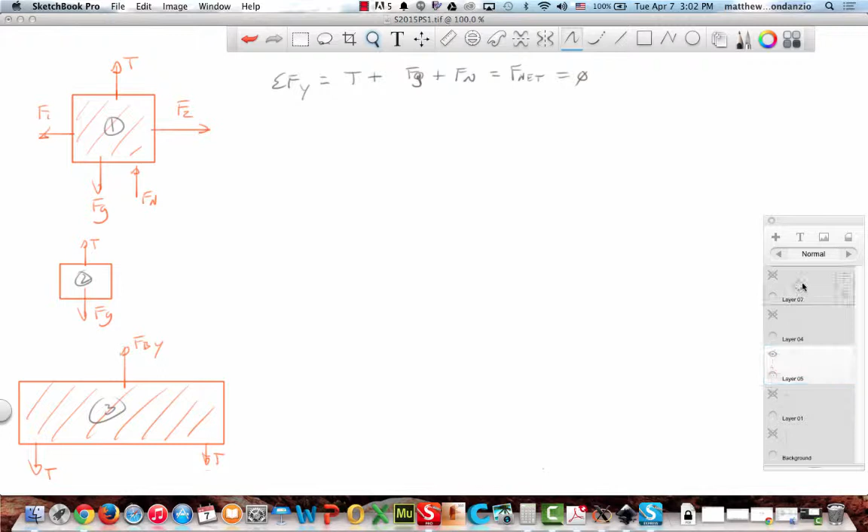Okay, quiet, quiet. Shh. Okay.

Okay, so this is the problem from last week, okay? We're going to hopefully get through all of it today. I might not get through all of it. We're going to finish up tomorrow. We're going to continue on with friction and torque. We're going to do one more quick problem with friction. Actually, we're going to do one more, not quick problem, but an angled block problem so we can deal with an inclined plane. And then we're going to move on to torque, okay?

Yes. All right. We're going to have a laser cutting project for everybody in torque. We're going to make a mobile of some sort so you can actually physically make something, okay, to do balance and center of gravity. Huh?

A what? No. This should be a lot quicker. Yes, sir. No. You guys, where's yours? You were saying no. You can watch it. I want you to watch this. Okay. Turn it in. Okay. I really don't care. Right. My issue is I want you to understand the problem. Okay. So work it with me. And if you get questions, you talk to me. Joe, what's up?

I'm still working on the requirements, but I'm determining, do you guys want to make your own mobiles or a large class mobile? Okay. We're going to do a large class one then. So you have your own individual pieces that you'll do. All right.

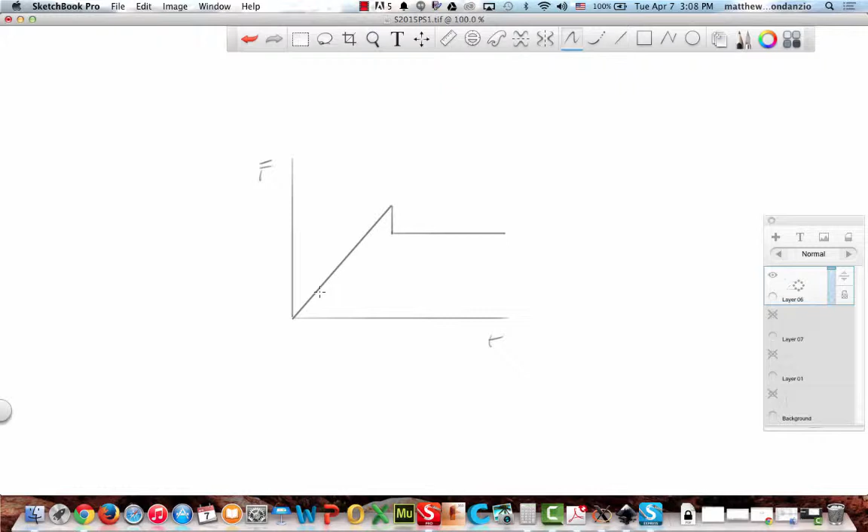If the static friction force ends up being 100 newtons, let's say it's mu times F of n is 100 newtons, okay? And I pull with 50 newtons, what's the actual friction force? It's hard to do this like here. Okay, all right, here's the scenario. Ready? Here we go. Here's the example. Give me my rope. Where's my rope? Here's my rope.

Okay, I need a volunteer. Come on up. I wanted to do it. I'm sorry, that doesn't work. It does. Stand on this. No, do it like this. Like this. Hold tight. Wait, don't stand on it, because it'll fall over. Listen up. Everyone watch this. This is important. I'm doing it visually.

Look. There's a static friction force that I have to overcome to get him to slide, correct? Let's just call that 100 newtons. Pull back on me. Am I pulling at 100 newtons? No. How about now? No. Okay, but I'm pulling less than 100 newtons. Let's say I'm pulling 50. How much is Iman pulling back? 50. So the friction force is always equal to my tension, my pulling force, until I overcome it. Does that make sense? Okay, thank you very much.

So wait, the friction force is like the force? No. It's exactly, because friction... But it's like the horizontal force. Exactly, because you don't have multiple forces vertical. Right. Boom! And look, friction force equals mu times the normal force. Okay. All right.

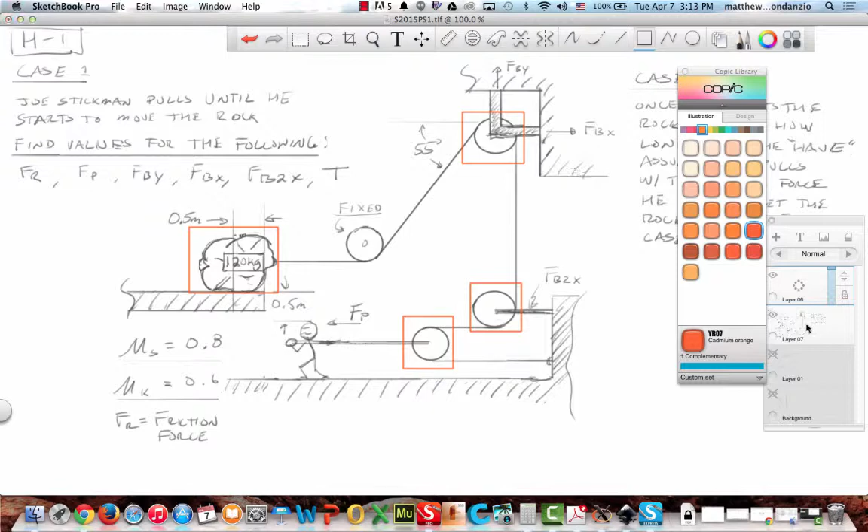You wasted so much time this grade. I know. All right. So what are my forces on the rock? I don't know, Mr. A. No, I'm just kidding.

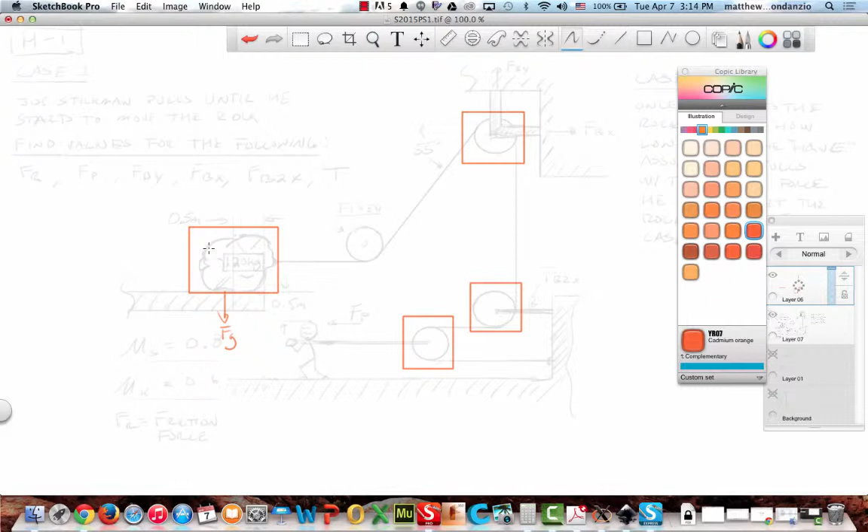Okay, force normal, force gravity. Force of gravity down. Force friction. Yeah, there's the normal force, force tension going up. There's a normal force, force of gravity going down. Sorry that I'm just on a different pace than everyone else. There's the T going towards the right. The what? The T. And then there's the force of friction going towards the left. Okay, there's a force of friction going to the left.

Now, is it static or dynamic? Wait, is it moving or not? Okay, both of them will go to the left, right? Both of them will go opposite from what you're pulling. So depending on which case, but they're both going to go that way.

Okay? I like how you casually just have these things sitting around. I could just write Tina right now. Honestly. And then it's recorded, and we will give that to the police.

Okay, next scenario. What are my forces on the top right pulley? You need the force of the bracket up and right. Okay, so there's an FBY, and yeah. Maybe the force of the rope at an angle. Wait, before we do the angle, it's the T. You have a T going down. And you have a T going at the angle, but you have to break that up into X and Y, because when you put the force on the free body diagram, you've got to do it at an angle, right?

So it's TY and TX. Everyone with me? Because there's still a rope over here. You see, there's two ropes. These two T's represent this tension here. Alexa, do you see that? And then there's another tension coming down.

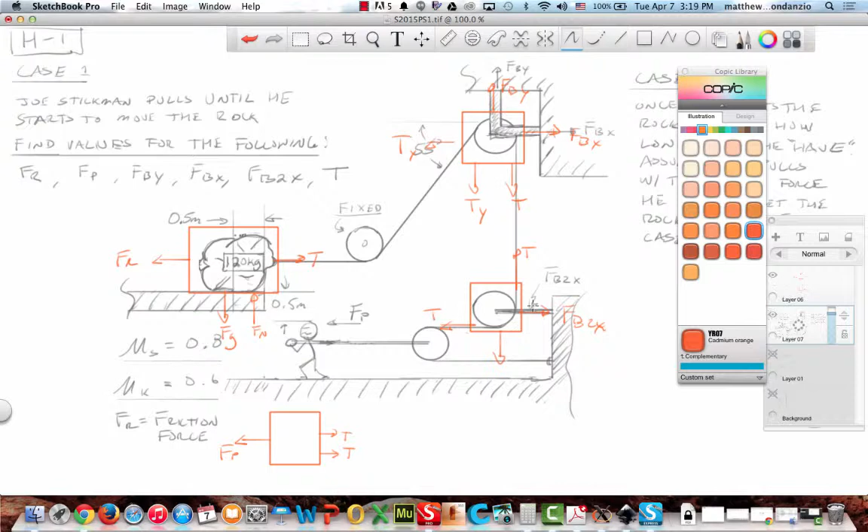What's actually happening is we're creating a moment. If it's like hard, I can't pull it up. Right, but it's trying to bend it around this point right here. So we're actually creating, guys, a moment arm. When we get into torques tomorrow, we're going to talk about that. Okay? All right?

So now I'm going to call this one, Usama, what? What am I going to call this force? Kiddo. Force the... Matt said it. I know he said it. I can hear him. Matt thinks he's quiet, but he's not.

Usama, I need you to pay attention and stop whatever you're doing. Where's your paper, sir? Where is it? Wait. It's at home? Okay, hold on. I wasn't here on Friday, so I couldn't. No one was here on Friday, sir. Usama, I received no email. Yours is now an incomplete. When I receive it tomorrow, maybe, then it will be 10 points off, because it will be late. Is that clear?

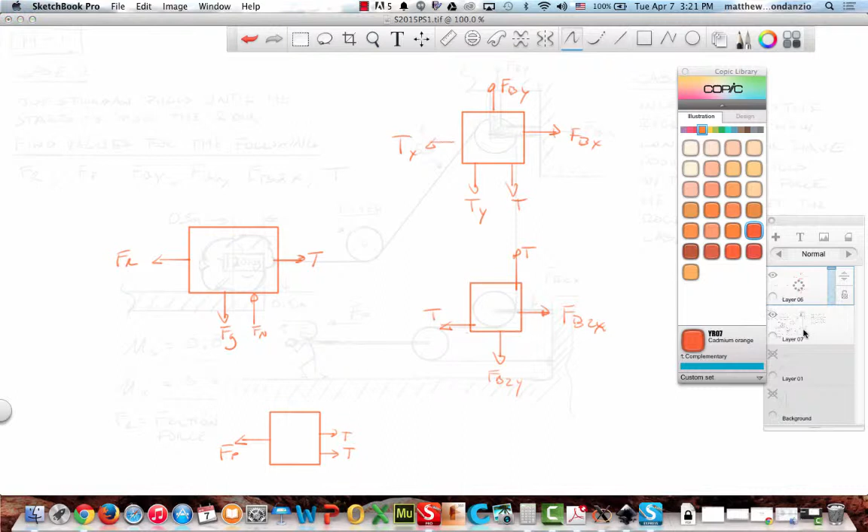Kind of motivating, actually. Demotivating or motivating? Motivating. Unless it's a legitimate reason why you couldn't. Like if you were actually absent, you have zeros as a filler. But you put in a 0 for mine, but it wasn't weighted, so it didn't bring my grade down. All I care about, guys, is you understand the material. That's my goal. Can we finish? Yeah, let's finish. Okay, so let's move along.

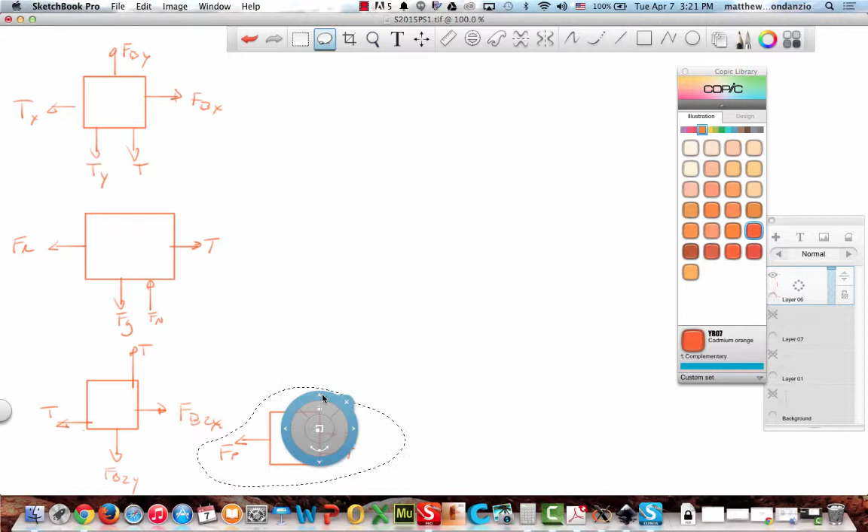Why in the heck do I draw these free body diagrams anyway? To know what forces are acting on it. Yeah, to account for all of my forces, so that I can then do what? Summate. Is that a word? Yeah, I can create a sum and essentially an equation, right? Okay, so I can now create an equation that models my forces, correct?

All right, let's look at number 1, free body diagram 1. This is for my rock. Wait, no, that's for my upper right pulley, because it's TY, TX, right? So how many directions of force do I have? Two. I have forces in the x direction and forces in the y direction. I asked that question, misleading as it is, so that I know how many equations to write. Does that make sense?

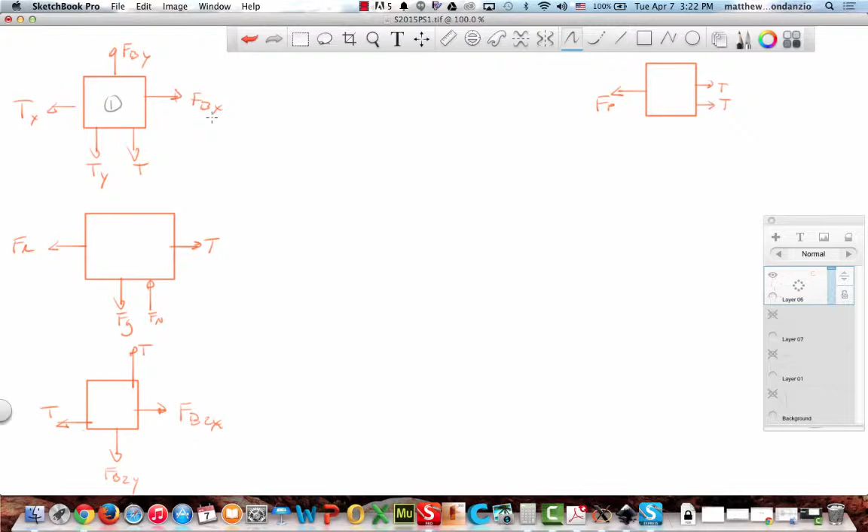Some people might say, well, I have one up and one, two here, then two there, so it's four directions. I get why they say it. So the sum of the forces.

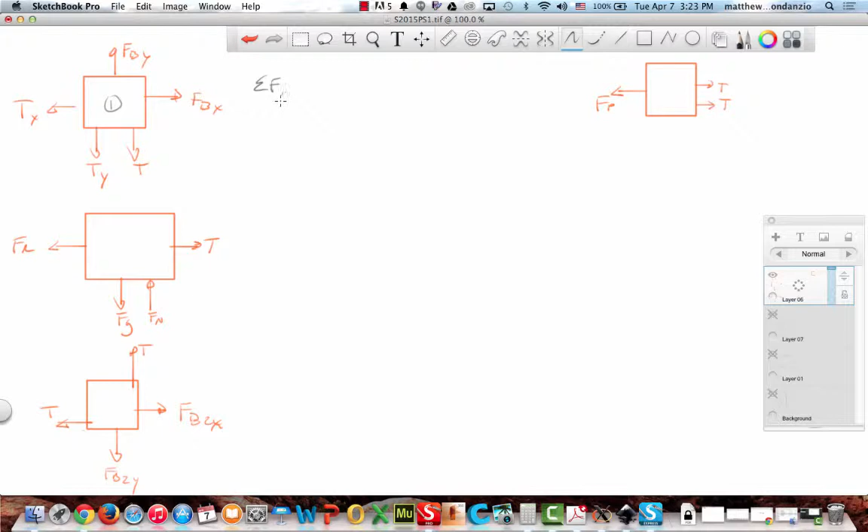You're not gonna make us do a three-dimensional one of these, are you? No, that would be cruel. But by the way, in freshman engineering, you will do those kinds of things. I had to do those. If you can do this, you can do three-dimensional. It really isn't hard. It's actually kind of fun, like Zen. It's therapeutic.

So the sum of the forces in the y direction. What are my forces I'm summing up? Ram, what are they? We've got our force of gravity on the bottom. Look at my free body diagram. What force do I have in the y? TY. FBY. What else do I have? T. What thing does that equal? What kind of thing does it equal?

Net force. It equals a net force. A net force, okay? That force, if my pulley is not moving, then that net force equals 0. Okay, that's okay. No, I just wrote 0, that's fine. But I'm kind of hitting this point home because I want to make sure, because force equals what? Mass times acceleration. Okay, and that was too easy. You got to answer a hard one. So if I have a mass, then my acceleration must be 0 if I'm not moving, and therefore my total net force is 0.

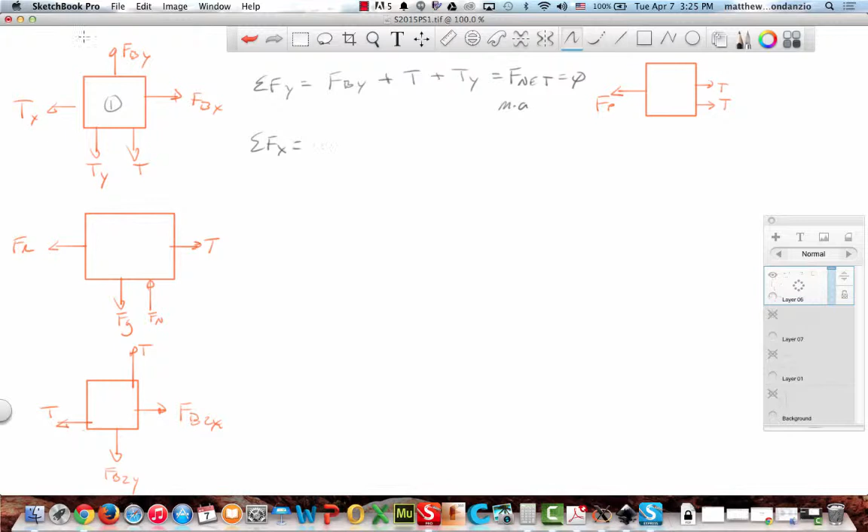Because in the case of this rock here, this rock will eventually have an acceleration to it, won't it? So we'll have a net force that's non-zero. Okay, so sum of the forces in the x direction, what are those forces we're summing up? Andy Bell, what are those forces in the x direction for this? TX and then FBX. And that net force equals what? 0. Beautiful. Now let's go to the next one. Notice everything's with variables. No numbers whatsoever yet, right? This is how you guys need to do this on the exam.

Sum of the forces in the what? How many directions of force do I have in the next one? 2, right? So let's do F of y again. F of y, what are my forces in the y?

I also have a question. On the exam, on every single T and F, do we have to have units on every single one of those? No. I'm going to require you to make sure that whatever you equal in the end has units in it. But your signs need to be there. Yeah, I understand the signs, but units don't have to be there. Internally, no. At this point, we're just adding up newtons. It's fine.

So sum of the forces in the y. What are my y forces? Joe, what are my y forces? Y forces are T and O. Guys, you're not paying attention. Hence why I call on you. Joe, I'm working on this guy right here. What are my forces in the y? None? Which one are you? This right here. Joe, don't blame me for you not paying attention. You're not looking. Right here. What are my forces in the y? Now I see it. Go. Tell me. F G and F N.

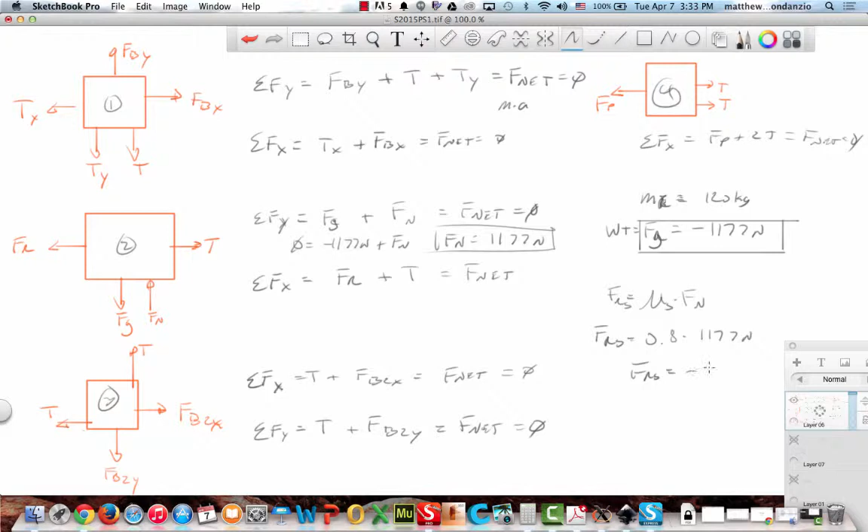Correct. So my friction force is negative 942 newtons. Why is it negative? Because it's pulling to the left, exactly. Now, can I use this anywhere? Yes. Put it on your diagram. In the sum of the forces in the x on diagram 2, I've got Fr plus T equals F net. Case 1, is everything static or moving? Static. Therefore, net force equals 0. So negative 942 newtons plus T equals 0. Therefore, T equals 942 newtons. Now, from that T, I can figure out all my other forces.

FB2x is going to be negative or positive 942? What direction is FB2x going? Right or left? Right. So it's positive 942 newtons. You guys see where I'm getting that? Okay, what about FB2y? Is it positive? Where is it? Oh, right there. Negative 942 newtons. Okay.

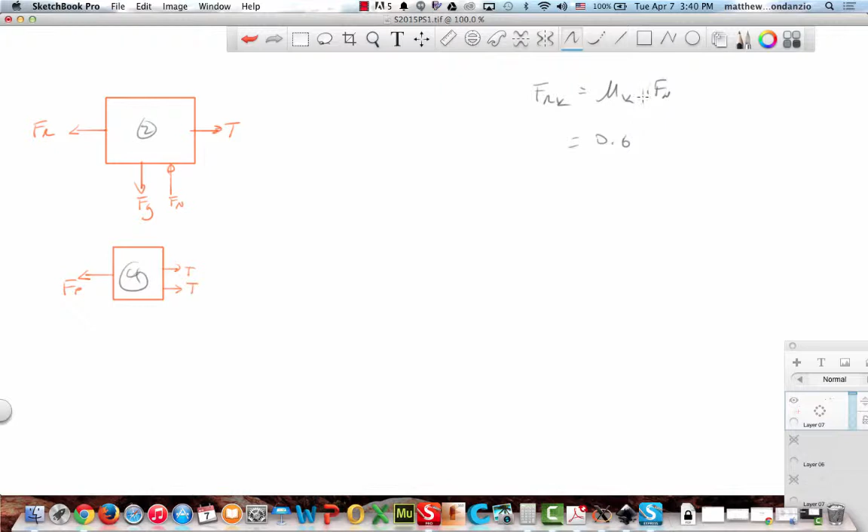Okay. So I said that the rock is moving. So that means what kind of friction are we in? So friction kinetic equals mu kinetic times the normal force. What was our normal force, guys? Negative 1172? Is that right? 1177. So 0.6 was our mu k times 1177 newtons.

So our friction force kinetic is equal to what? 1177 times 0.6 is 706. Okay? So we've got 706 newtons. And that's negative, right?

Now, I said that in this case, his F of P was equal to what? F of P case 1 plus 1 newton. So that means it's what? 1884 plus 1. So F pull is equal to 1885. Right?

So if we look at this guy here, the sum of the forces on the X is equal to F of P plus 2T, okay? And we're going to look at that initial case, right? When it's 0, F of P is equal to the opposite of 2T. Negative 1885 plus 2T equals 0. So T equals 1885 divided by 2, which is 942. So it's 942 newtons, right?

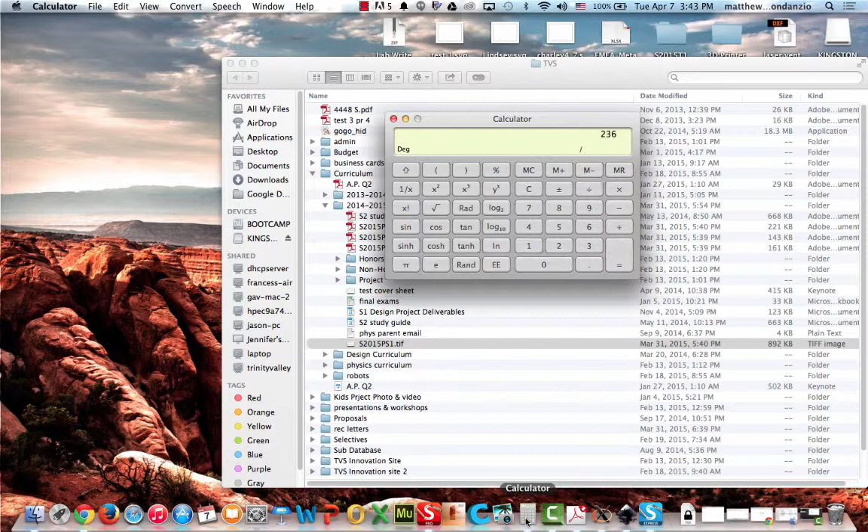That means we're accelerating, aren't we? How much are we accelerating now? How do we determine that? Okay, so 236 newtons equals mass times acceleration. Mass is 120. So acceleration is equal to 236 newtons divided by 120 kilograms, which is equal to what, guys? 236 divided by 120 is 1.97 meters per second squared. Everyone with me?

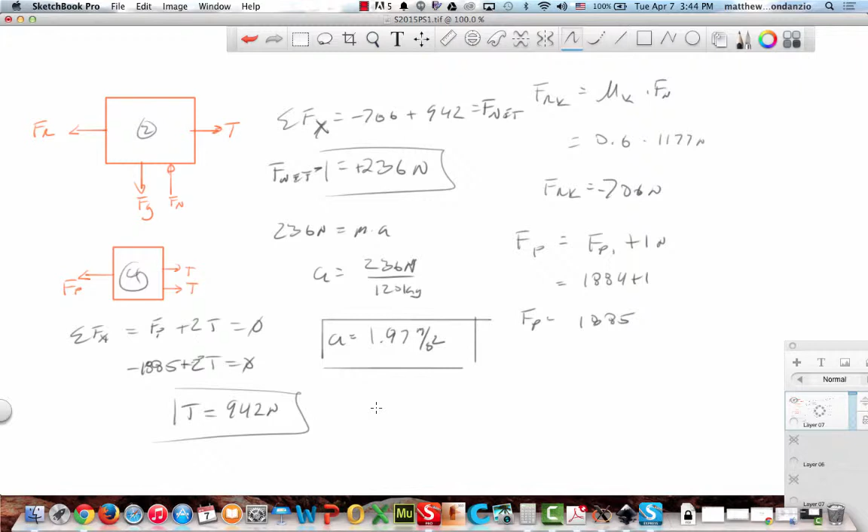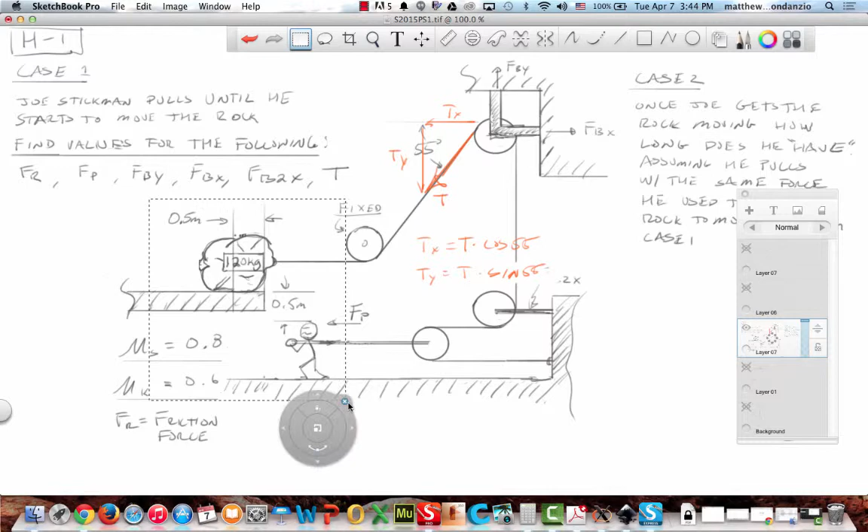Okay, so now the question is, how long does it take for it to move? I come over to here, I'm going to copy this and add a new layer. Our acceleration is 1.97 meters per second squared. He's got a half a meter to go before he starts to fall. We're looking for time now, right? So you guys figure the rest from here? We'll finish it off tomorrow. Okay. All right.